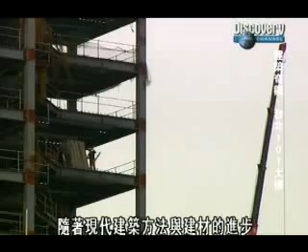If you're looking at the history of skyscrapers, really you begin in America, Chicago and New York are the classic cases. But in the last, let's say, 10, 15 years, Asia's really boomed with regards to the building of large structures. In recent years, Asia has seen an explosion of mega-scale building and industry. The region now holds 8 of the world's 10 tallest buildings. And as modern construction methods and materials continue to improve, designers will continue to aim ever higher. Not because they have to, but because they can.

Developer Harris Lin is one of the most powerful and successful businessmen in all of Taiwan. A member of a major construction dynasty, for him, Taipei 101 is the result of a lifelong ambition. Since I was a boy, I have dreamt that one day I would build a great building, one which will benefit later generations for a very long time.

For Harris Lin, Taipei 101 is more than just a building. It's a statement on Taiwan, its people, and its future. A notice to the rest of the world that Taiwan has the technology, the industry, and the determination not just to join the giants of global industry, but to lead them. There's no better way, really, of getting global attention than building these super tall buildings, particularly if it's the highest in the world.

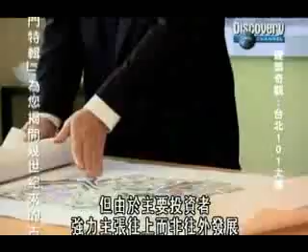Initially earmarked as the centerpiece for the growing and glitzy Xinyi district known as Taipei's Manhattan, the primary goal for the building is to be the best, but not necessarily the tallest. Long-standing friend of Harris, architect C.P. Wang from C.Y. Lee & Associates, comes into the project in the early stages. We started with 3 buildings, a 60-story building in the center and 2 smaller buildings that are about 20 stories for the different shareholders. But plans quickly evolve as key investors clamor to have the building push up, not out.

The planned 60 stories soon turns into 88. And with the mantle of the world's tallest a mere 13 floors away, the momentum becomes unstoppable. We truly believed we could do it. That if we worked hard, we could make a building that was visible to the entire world.

But three factors combine to make this project not only the tallest and most visible in the world, but also one of the most difficult to build. Taipei City is an inhospitable place to build a skyscraper. Beneath the earth, a thick layer of soft clay demands uniquely designed foundations. While above ground, the threat of earthquakes and typhoons requires a level of engineering and construction never before achieved.

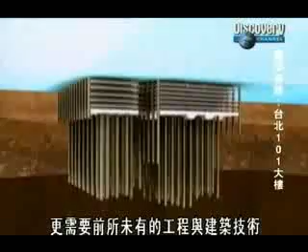If Harris Lin wants to make the tallest building in the world here, his engineers and builders will have to confront the power of the earth. Designing a structure flexible enough to resist an earthquake, but stiff enough to resist a typhoon. Contradictory requirements that until now have never been combined. All these different mixtures of elements have to be blended almost superbly in order to make the building achievable.

The solution will combine two revolutionary systems. First, a braced megaframe joined to 8 super columns filled with a mixture of steel and concrete. And a tuned mass damper, a giant pendulum, the weight of 10,000 people, designed to oppose the effect of wind. The combination of these two concepts is groundbreaking. I am very proud of it, and as architect, you don't get a lot of opportunity to work on something of this magnitude.

Construction will take 6 years, 2,000 workers at any one time, and 700,000 tons of the most advanced steel and concrete ever made. These cost more than the national GDP of some countries. Yet despite all the investment, ingenuity, and determination of humankind, the forces of nature can strike at any time, whether you're ready or not.

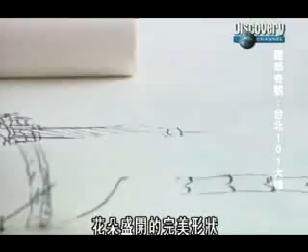Taipei 101 will be built to withstand earthquakes and typhoons, but it also needs to withstand the test of time. To be a true landmark, it must look unique. Its appearance mixes traditional Chinese icons, bamboo for strength and resilience, a pagoda for serenity, the perfect form of an open flower, and the luck and prosperity associated with the number 8.

We tried very hard to do something that we hope can represent the city, the island, as well as our culture. The result is this: 508 meters tall, 101 floors from ground level. A building that looks completely unique, but soon proves challenging to build.

Every major skyscraper in the world is a trade-off between what will look good and what will stand up. For a tall building this height, you cannot escape the practical matters. It has to work. Taipei 101 will be the tallest skyscraper on Earth. And the forces on a building of this scale are truly immense.

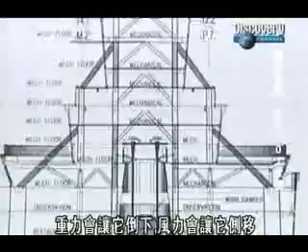Gravity forces it down, while wind pushes it sideways. Existence is a tenuous balance between being strong enough to stay up, but not so heavy as to cause collapse. Most skyscrapers have exterior walls that are either straight up and down or sloping in. But Taipei 101's unique shape sees much of its exterior surface sloping out.

Here at Evergreen Consulting, engineer Shaw Shi oversees plans that will translate Taipei 101's unique exterior into one of the strongest, lightest, and most resilient interiors ever made. The shape of Taipei 101 is more complicated than regular tall buildings, because simple and straight lines will be easier to work with.

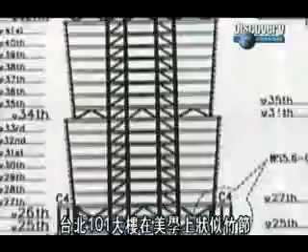Aesthetically, Taipei 101 is broken into sections resembling a stem of bamboo. But similarities with this fast-growing superplant don't end here. Just like bamboo, the distinct structural sections of 101 strengthen and support the whole building. Each section operates as an independent unit, transferring the building's massive weight away from the outside of the building and into the middle. The result is a stronger, lighter, and more flexible tower.

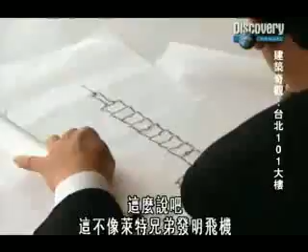For C.P. Wang, this sort of lateral problem solving has been integral to the success of the project. Their aim is not just to be the highest, but to be their innovative best. Let me put it this way. It's not like the Wright brothers when they invented the airplane. You know, today a lot of people know how to build an airplane, but it's how good it is that matters.

The design of Taipei 101 requires unique engineering to facilitate a unique shape. But the next challenge facing designers pushes this engineering to the limit. How to make the tallest building in the world stand up against two of the mightiest forces of nature in one of the most hazard-prone cities on Earth.

Every year, the people and buildings of Taipei are under attack from two of nature's most primal and unstoppable phenomena. When you put a tall building on an old secondary earthquake fault line, which runs nearby here, and in a place where you get significant typhoons, that just has major challenges.

The problem is that to resist wind, a building must be stiff. But to survive an earthquake, it must be flexible. Taipei 101 will have to be both. This is the only super tall building in the world that's designed in a seismically active zone. This is really pushing engineering and construction boundaries right to the limit.

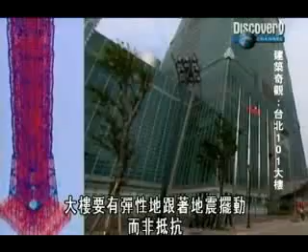The effect of an earthquake on a giant skyscraper can be catastrophic. The entire building is shaken to its foundation as intense waves of energy from the Earth are transferred to every inch of the building structure. To withstand these shocks, the building needs to be flexible so it can move with a quake and not against it. If it's too stiff or brittle, it can break.

Superficial damage like broken windows or walls can be repaired. But any damage to the internal steel framework of a building can be a disaster. As the tallest building in the world, Taipei 101 must be engineered to withstand major earthquakes. But just how major is something of a mystery. Geologist Dunstan Chen is one of the scientists charged with finding out the details.

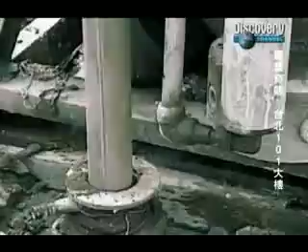This is when we make the first design, okay? We have to consider this fault. We know there's a fault somewhere here, but we don't know exactly where it is. An investigation is launched involving some of Taiwan's leading geologists to find out where the fault is and how far it is from the Taipei 101 site. They need to establish if it's active and how they should deal with it.

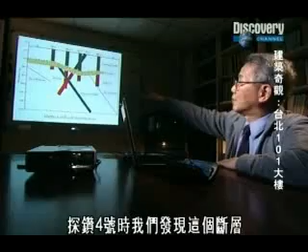The results shock everyone. Then we drill number 4. Okay, we encountered the fault. And this fault, actually, the gouge was around 10 meters thick. It's a huge one. In most earthquakes, the closer the building is to a fault, the worse the impact. The fault found by Dunstan and his colleagues is not only huge, it's close. Only 200 meters away from the 101 construction site. 101 must be prepared to face the most extreme earthquake shocks imaginable.

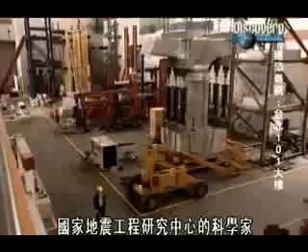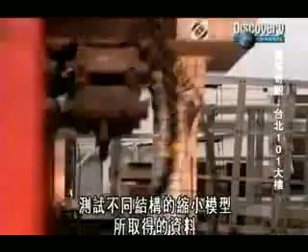Here at the NCREE facility, scientists use a multi-dimensional shake table to simulate a variety of different earthquake scenarios. Scale models of different structural configurations are tested, and the information gained helps to design buildings that are better able to withstand the devastating impact of earthquakes. An earthquake shock delivers brutal vertical, horizontal, and twisting strain on a building. Every joint of every structural element is strained, and if there is one weak link, the whole lot can go.

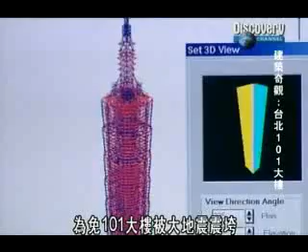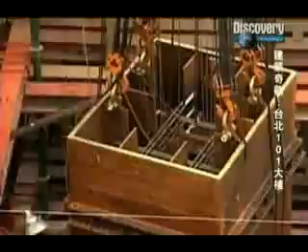To keep 101 standing in a major earthquake, engineers develop a complex internal megastructure. The central core of the building is connected to 8 incredibly strong supercolumns by a network of horizontal outrigger trusses. The supercolumns act like a giant flexible spine, enabling the building to flex and move if it needs to, but not break. Although the idea of supercolumns has been used in other buildings before, the size of 101 takes this engineering to an entirely new level. But the threat of earthquakes isn't the only natural force that builders of Taipei 101 have to worry about.

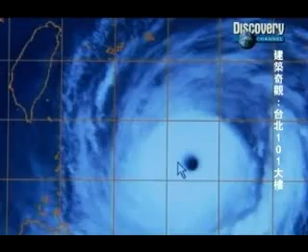Every summer, unstable equatorial air off the coast of Taiwan generates vicious typhoons that lash Taipei. These intense tropical storms, with winds of up to 200 kilometers per hour, can literally blow a building to pieces. But it's not just strong winds that designers of 101 have to worry about. The surface area of a skyscraper is so huge that even a small breeze can still have a major effect. As wind hits a building, it impacts in 2 ways. First, the exposed face of a building can be pushed by the wind like a giant invisible hand.

But under certain conditions, the wind can generate pulsing vortexes on opposing sides of the structure. The vortexes begin to oscillate, exerting small but consistent pushes on alternating sides of the building, eventually causing it to sway. Like a child pumping their legs on a swing, each gust of wind adds energy. This swaying can be so severe that occupants of high-rise buildings can experience motion sickness.

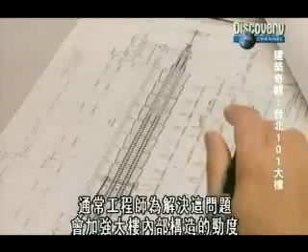Normally, engineers can accommodate this problem by making the internal structure of a building stiff and rigid. But being stiff is exactly what designers don't want in the event of an earthquake. Can engineers of 101 design a building that is both stiff and flexible at the same time? For the project to go ahead, they have to.

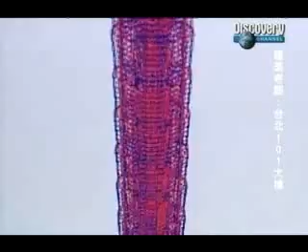Taipei 101 is so massive that finding ways to minimize the effects of wind is a vital element of its design. Engineers and scientists begin with the building's exterior. They find that by using re-entering or saw-toothed corners, the flow of wind around the building is drastically reduced. The results of wind tunnel testing: the re-entering corners help to reduce the dynamic wind response by 30 to 40%.

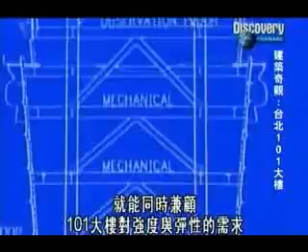Saw-toothed corners on a building hinder the formation and impact of the small wind vortexes that can cause it to sway. But just like the pumping of a child's legs on a swing, where each push adds energy to the last, even when the effective wind on a skyscraper is reduced, energy will continue to gather unless it's removed. It's not the size of the push that matters, it's the repetition. If engineers can find a way of canceling this accumulation of energy, then the building's contradictory requirements of strength and flexibility will finally be met.

Usually, a lot of tall buildings use so-called computer-controlled mass to do that function. In our case, I think our very smart engineers come up with this passive tuned mass damper. The passive damper on 101 uses a huge weight hanging from an upper floor to counter the effect of wind. As Taipei 101 sways in one direction, the tuned mass damper swings in the other, cancelling the buildup of energy and reducing the building's motion.

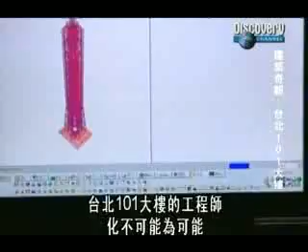Engineers of Taipei 101 have made the impossible possible, designing a building that is stiff enough to survive a typhoon, yet flexible enough to survive an earthquake. But although these ideas seem to work on paper, they are yet to be proven in practice. 101 is going to need a lot more than just new design to combat nature. It's going to need entirely new materials and construction methods as well.

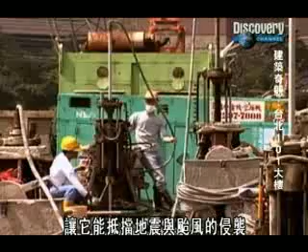Taipei 101's unique megastructure and wind damper will make the building resist the impact of earthquakes and violent storms. But all of this engineering means nothing unless the giant building has a solid foundation on which to sit. Finding solid ground in Taipei is a lot harder than it sounds. Over hundreds of thousands of years, changing sea levels have filled the Taipei Basin with layers of soft, unstable silt and clay. In order for the tallest building in the world to remain standing, its foundations must penetrate through this layer, sometimes 60 meters thick, to find the solid bedrock below.

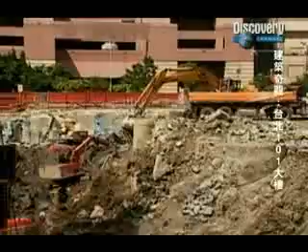Geotechnical engineers spend 8 months collecting core samples to analyze the soil on the building site. They find 3 distinct layers of soft sediment before finally reaching solid ground. This information helps designers to develop detailed plans for 101's foundation structure. Preparing the foundations takes 15 months and removes 700,000 tons of earth from the site.

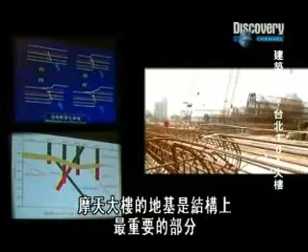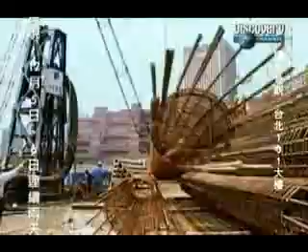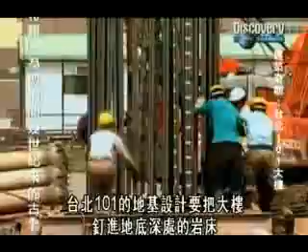The foundation of a skyscraper is one of its most vital structural elements. It must distribute the building's enormous weight evenly below ground, at the same time creating a super strong base for the towering megastructure above. That's the key point for the whole building, that the building can stand up into the sky. To compensate for the inherently unstable ground of Taipei, 101's foundation is designed to literally pin the building to the deep layer of bedrock below. A 23,000 cubic meter concrete slab sits on top of a complex system of 382 reinforced concrete piles.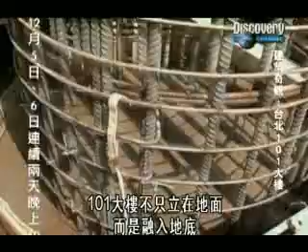These piles transfer the building's weight and structure deep into the bedrock, meaning 101 is more than just resting on the earth. It's fused to it. This unique foundation, combined with 101's mega frame and damper, give the building an extraordinary earthquake safety rating that exceeds even that of Taiwan's nuclear power plants. Inside the 101, during an earthquake, you watch out for the falling articles, okay? Rather than worry about the falling of the building. Taipei 101 will not just be one of the strongest and most stable buildings in Taiwan, but one of the strongest and most stable buildings in the world.

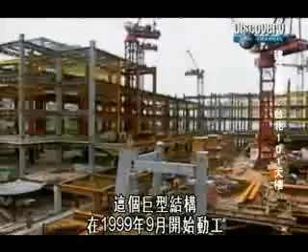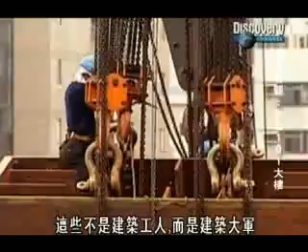Building on the main megastructure begins in September 1999. If I look back, I feel it was more difficult than I expected. But I didn't feel that way when I was working and solving the problems every day. This isn't a construction workforce, it's a construction army.

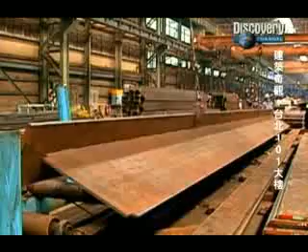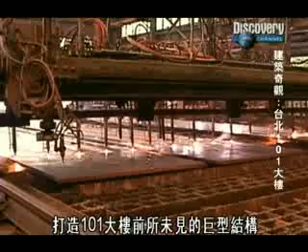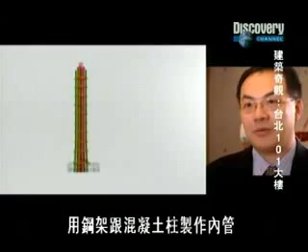Here at the Kaohsiung China steel plant, some of the most high-tech steel manufacturing techniques in the world are being used to build the various elements of 101's groundbreaking megastructure. The basic idea of this building is so-called double tube structures, which means we use the steel frame to create the outside tube, and then we use the steel frame and the concrete columns to create inner tubes.

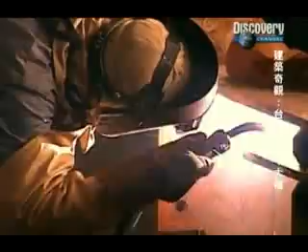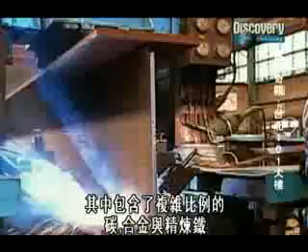The steel used in Taipei 101 needs to be soft enough to weld, hard enough to carry the building's awesome bulk, and pliable or bendy enough not to weaken or break if it's rattled by an earthquake. Each of these requirements demands a different type of steel, a complex chemical cocktail of carbon, alloy, and refined iron. More carbon makes it stronger, but too much and it becomes stiff, brittle, and hard to weld.

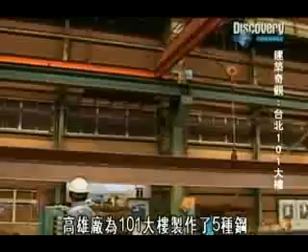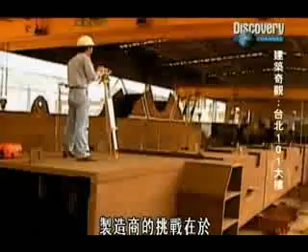The Kaohsiung plant develops 5 different kinds of steel for 101, each with a specific flex-to-strength ratio designed to suit its purpose and position in the building. The challenge for manufacturers is to make perfect steel into perfect components for 101 each time, every time, day after day.

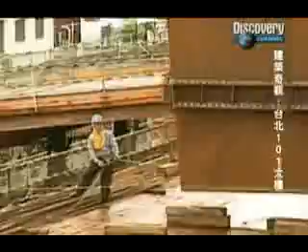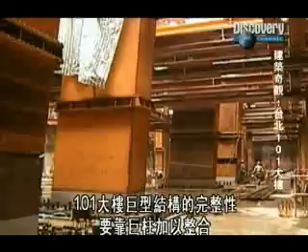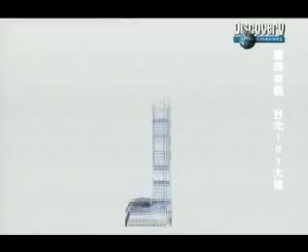The integrity of 101's megastructure requires the super columns to act as single units. But joining 30 90-ton box sections into one seamless unit has never been done before. Yet again, 101 will tread new ground. Ordinary welding techniques simply won't cope with the enormity and detail of the task. Every millimeter of every join requires absolute perfection.

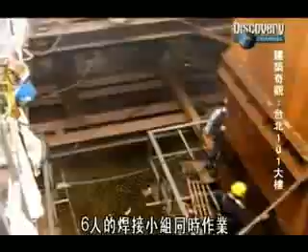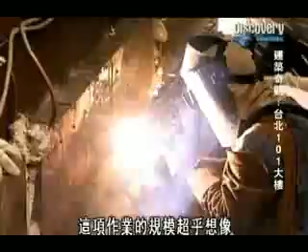Teams of 6 welders work simultaneously. The entire girth of each join has to be heated for the welds to bind. The scale of the task is mind-blowing. Each join takes at least 14 hours to complete. That's nearly 2 years welding in the super columns alone. The high-strength steel and advanced welding techniques used in 101's super columns give the building a strong and flexible backbone built to withstand the shock waves of a severe earthquake.

But dealing with the building's incredible weight demands an entirely different type of strength, one that steel alone cannot provide. A building usually has 2 types of force, the tension force and the compression. And we all know steel works better for tension, and concrete works better for compression. The awesome weight or compression loading on the world's tallest structure would crush the super columns if they were hollow.

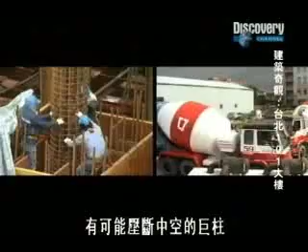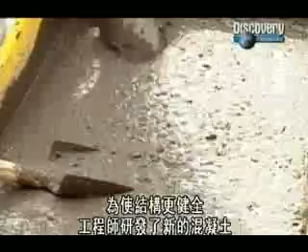But filling them with concrete to the 62nd floor combines the tensile strength of steel and the awesome compression strength of concrete. Making the system even more robust, engineers develop a concrete mix that is 60% stronger than normal, concrete able to withstand an awesome 10,000 pounds per square inch of compression. The combined benefit of steel and concrete gives 101 the strongest, lightest, and most flexible backbone of any skyscraper on the planet. A backbone that is about to be put to the ultimate test.

2:52 p.m., March 31st, 2002. A magnitude 6.8 earthquake rocks northern Taiwan. The entire island is brought to its knees. And in Taipei, only 135 kilometers from the quake epicenter, over 100 houses are destroyed and at least 5 buildings collapse. The quake wreaks havoc on the construction site of 101. 2 purpose-built cranes topple 240 meters to the ground. 5 workers are killed and dozens more injured. A taxi driver fleeing his vehicle is crushed. Taipei is a disaster zone.

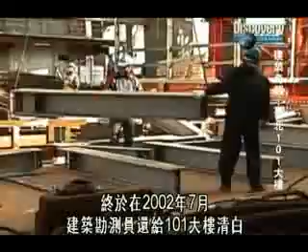Finally, in July 2002, the building surveyors give 101 a clean bill of health. The internal framework is intact, and once more, work can resume. But the victory is bittersweet. No scientific test could have proven so effectively that 101's mega frame can resist a severe earthquake. But no scientific test would have come at so great a cost.

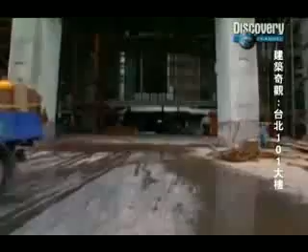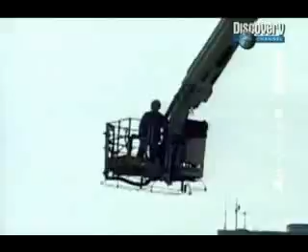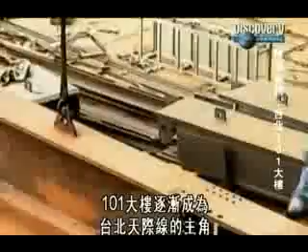The notorious March 2002 earthquake has put 101's mega frame under the most extreme test imaginable. But as work resumes and the skyline of Taipei is increasingly dominated by 101, a geologist from a prestigious local university discovers a worrying combination of data. Although only one severe earthquake has struck Taipei since work on 101 began, there has also been an unusually high number of smaller ones. Taipei 101 might not just be the victim of recent quakes, it might be the cause.

is beyond us. Dr. Lin believes the enormous weight of 101 may have reawakened Taipei's dormant fault lines, increasing the threat of earthquakes, not just to the building itself, but to the entire city. Although Dr. Lin cautiously states that this theory is not yet scientifically proven, the circumstantial evidence seems compelling. Bigger earthquakes, and more often, since the construction of Taipei 101 began.

But foundation engineer Dunstan Chen explains why he believes this hypothesis is fatally flawed. That's actually at the beginning. For every high-rise building I built in Taiwan, we consider the weight of the structure should be more or less equivalent to the soil you excavated. The net change in pressure on the Earth as a result of 101 is nil. 700,000 tons of construction has gone up, but 700,000 tons of earth was dug out to build it.

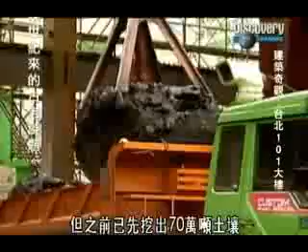The unpredictability of seismic activity means that either way, we may never know for sure. And regardless of what causes the frequent earthquakes in Taipei, this man-made marvel is being built to withstand them.

Although concrete is one of the oldest and most widely used construction materials, it's incredibly heavy and, like a liquid time bomb, has to be pumped into position before it sets. These two factors pose a major challenge for construction workers on 101. The concrete they use here doesn't just have to get from the plant to the building, it has to get up the building as well. Once you leave the batching plant, within 2 or 3 hours, you have to arrive on site and start pouring.

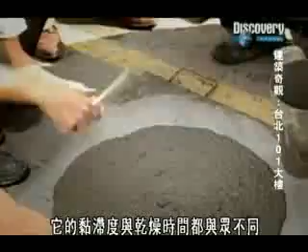To do this, engineers develop concrete with specific levels of viscosity or runniness and specific drying times. This buys them valuable time and helps the powerful concrete pumps to work more efficiently. The result is yet another world record for 101. Concrete is pumped from ground level to 450 meters. That's higher than any other concrete pour in history.

Construction reaches the 92nd floor in July 2003. Although nearing completion, the technological crown jewel of 101 is yet to be put in place. The tuned mass damper, the crucial windproofing mechanism designed to counteract the horizontal sway of 101's massive bulk. Although mass dampers have been used in skyscrapers before, they've never been this shape, they've never been this big, and at 380 meters, they've never been this high up. To be effective, the damper needs to be 0.1% of Taipei 101's total mass, a staggering 660 tons.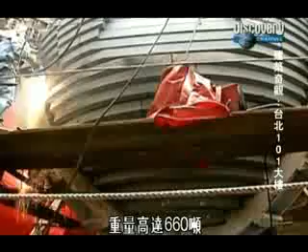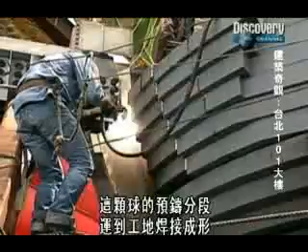Not even the awesome Taipei 101 cranes can lift something this huge and heavy. The ball arrives in prefabricated sections, which are then welded together on site. It's then hung from 16 10-centimeter thick cables and tuned to make it swing in exactly the opposite direction to the building. When the building moved by the wind, it would go against it and balance it out real quickly, very much like the shock absorber of a car. And I think this idea has not been used in any other building that I know. So I think we're the first one to try that.

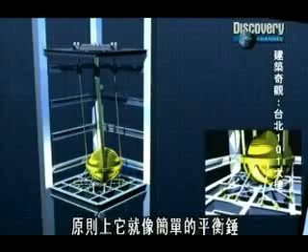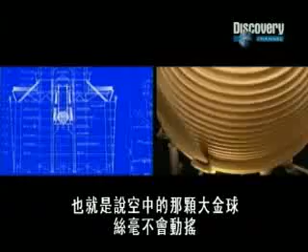In principle, it works like a simple counterbalance. But in reality, things are a little more complicated and a lot more clever. To stop the damper from rocking either excessively or out of sync with the building, the ball is attached to a series of hydraulic dashpots, like mega shock absorbers, that stifle the ball's movement. If the damper experiences a particularly sudden jolt, such as an earthquake, the hydraulic resistance in the dashpots is strong enough to create a lockdown effect, meaning that the big golden ball in the sky will stay exactly where it is.

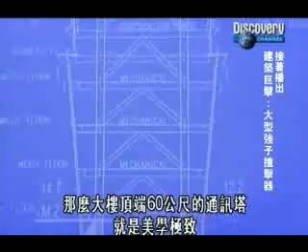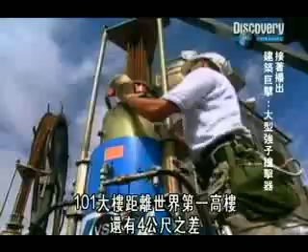If the mass damper is the technological crown jewel of 101, then the 60-meter pinnacle at the very peak of the building is the aesthetic equivalent. By late 2004, all major structural work has been finished on the main body of 101. Although this marks the successful completion of one of the most remarkable construction endeavors ever attempted, 101 is still 4 meters short of being the tallest building in the world.

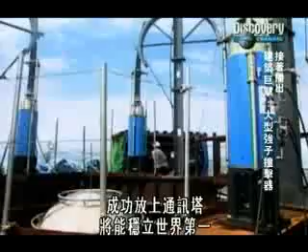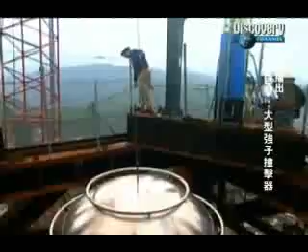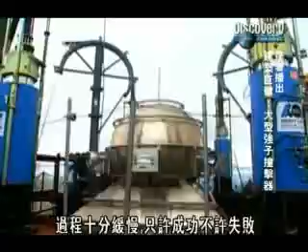Successfully raising the pinnacle will assure them the title, but at 400 tons, it will also be a logistical nightmare. Nothing this heavy has ever been lifted in this way at this height. It's not just difficult, it's dangerous. A system of hydraulic jacks and geared cables lifts the massive structure from its base. Progress is painfully slow, but victory is the only option.

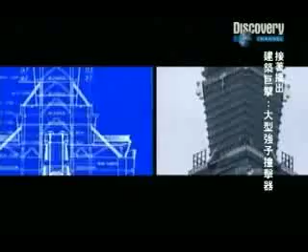Finally, after 14 days, the pinnacle is secured. Against all odds and against nature, the tallest building in the world is complete. Yet although this marks the end of one phase of the building's life, it is the beginning of another. Today, some of the world's biggest corporations boast offices here, and in peak periods, up to 40,000 people come in and out of the building every day.

It's like a city unto itself, only vertical. For a lot of people, until you see it, you don't believe it, nor do you understand it. Many of the everyday functions we take for granted are complicated exponentially by the addition of height, making the operations of this mega skyscraper a mega challenge.

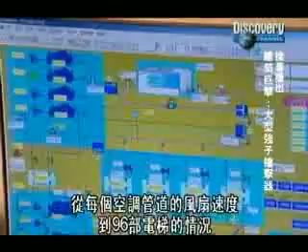Every minute detail of the building is monitored and accessed in here, the central control room. From the speed of every fan on every air conditioning duct to each of the 96 elevators, Operations Manager Jeff Shu and his staff can see and control it all. The security section monitors the focus, angle and zoom of each of 101's 520 surveillance cameras. The locks on even the most obscure doors are hardwired into the vast central brain of the security system.

Staff continuously monitor the use and supply of electricity, the flow of water, the fire hoses in the mall, even the level of seismic activity. Every visitor is photographed and checked twice without them even realizing. It sucks in the equivalent energy as 6,000 regular homes. It's dependent on 2 designated city substations and has backup generators in case of failure. There's enough electrical cabling in 101 to stretch from Taipei to New York and back again.

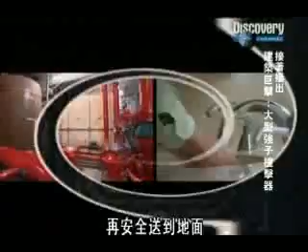The elevators are the fastest in the world. Traveling at 60 kilometers per hour, they go from level 5 to level 89 in only 37 seconds. Each carriage is pressurized to avoid ear damage, streamlined to minimize noise, and electronically balanced to ensure a ride so smooth that even a coin won't topple on the incredible journey.

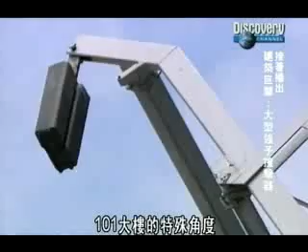To clean each of 101's 17,000 windows, custom-built gondolas dangle workers off the edge of the building. They can only work when the wind is under 10 meters per second, and even then, the cables have to be hooked into the walls to stop the gondola blowing off track. The awkward angle of 101 means that an elaborate counterweight system has to be used so that workers can get close enough to the walls to work. To clean the entire building takes 4 teams of 2 workers 3 months. The job is so big that as soon as it's finished, it's time to start again.

Inside and out, Taipei 101 pushes the boundaries. A unique-looking building that has changed the face of construction, design and engineering forever. The tallest building in the world, in one of the most hazard-prone places on the planet. Defying the powers of earth and wind, to go where no building has gone before. It's really a very, very important building. It is a landmark, a benchmark. Long after its mantle of world's tallest has gone, its achievement will remain. A symbol for the future of a proud island. A skyscraper that took on nature and won.